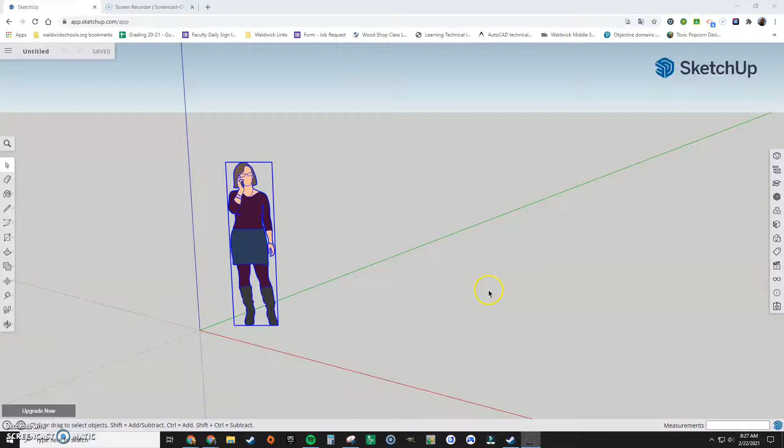In this video, we are going to emulate or mimic a routed edge in SketchUp.

Start by going to the bottom left item and clicking the magnifying glass. Here it says field of view, and if you change that to 0 degrees, it'll give you a flat view. Once you do that, click this magnifying glass, and it'll zoom you out so you can work with your things. It's much better for making flat sides of your object.

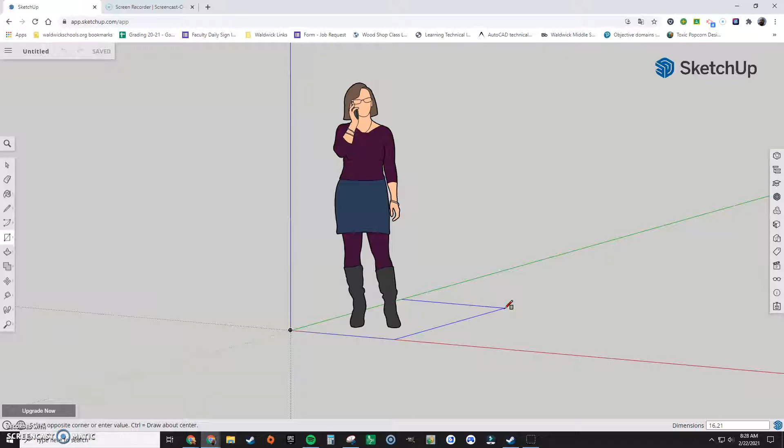Let's get into it. In order to do this, we need a rectangle because we are going to create a box that's 16 by 21 inches. Then we can get rid of the lady.

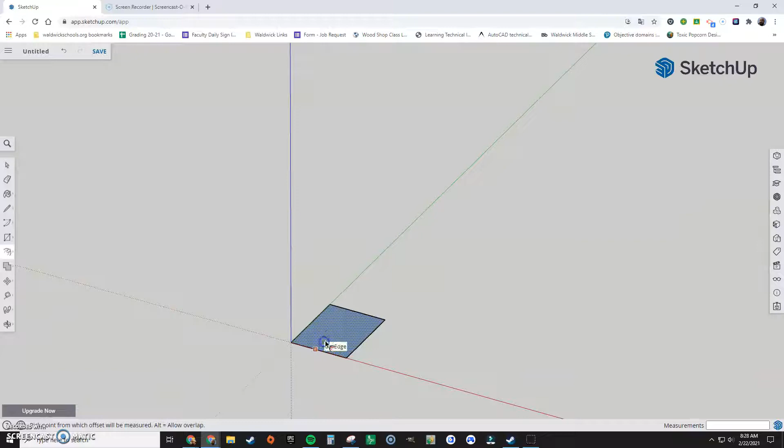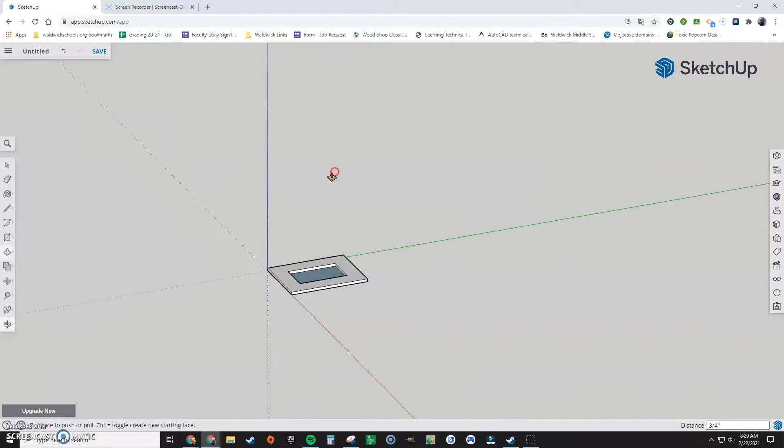Now we're going to use the offset tool to create a picture frame. I'm going to go offset, just to get a concept of how to do our routing, and offset this by 4 inches, so it's got a 4-inch boundary along the edge. Now I'm going to push-pull 0.75 inches, just like the wood we have available in the workshop, since we're doing the simplest type of routed edge.

Now our next task is to draw the edge that we are going to be routing. For today, I want to give you something fairly simple. Get your tape measure, and create a guiding line that's 3/4 of an inch: 0.75, enter.

Now we're going to get the protractor. Click the guide point we just made, click the end, and type in a 45-degree angle. This gives us a nice guiding line that we can use to create our routed edge.

Now, in order to do this, I'm not going to use measurements. I'm just going to draw some lines to help it look like a type of bit. I think that's called a cove.

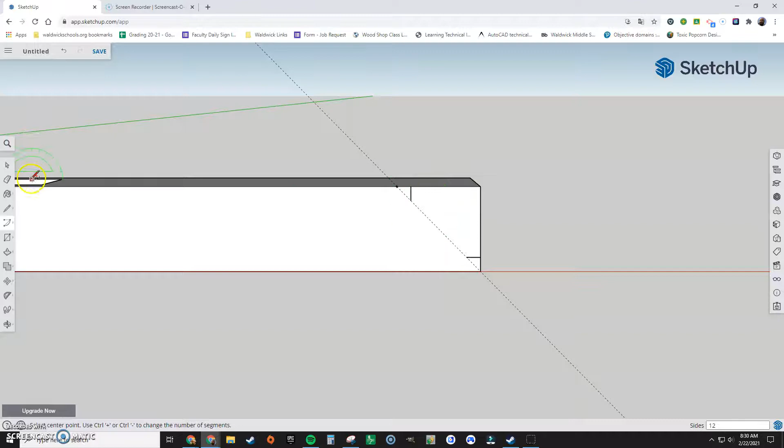Now I've drawn 2 lines that are close enough to each other, and I'm going to use my arc tool with the first one chosen. Let's try it again — getting that arc tool, I'll hover my mouse. There, it's snapped, and you can see blue and red guiding lines. I'll click this point, then select one of the endpoints of the lines, and select the other. If it isn't perfect, don't worry about it — just make a connection between these lines.

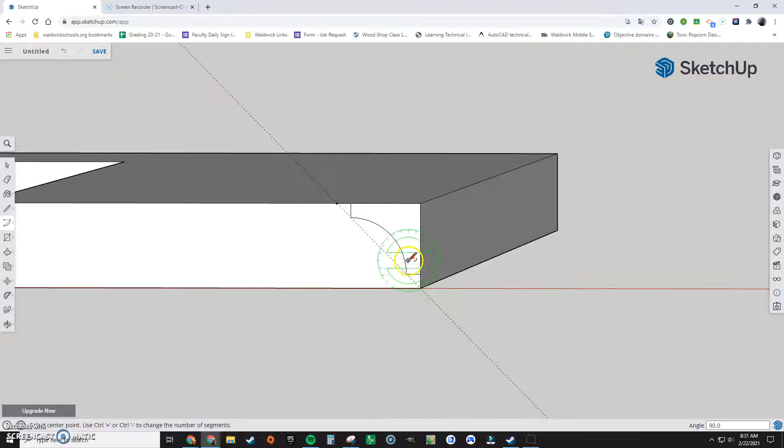One issue here is that if you have something way too complicated, what we're about to do will not work. At this point, you've got your design made. It looks great. We're ready to go.

Now we're going to use a tool called Follow Me — it looks like a little crab. I don't fully understand the picture, but you click that.

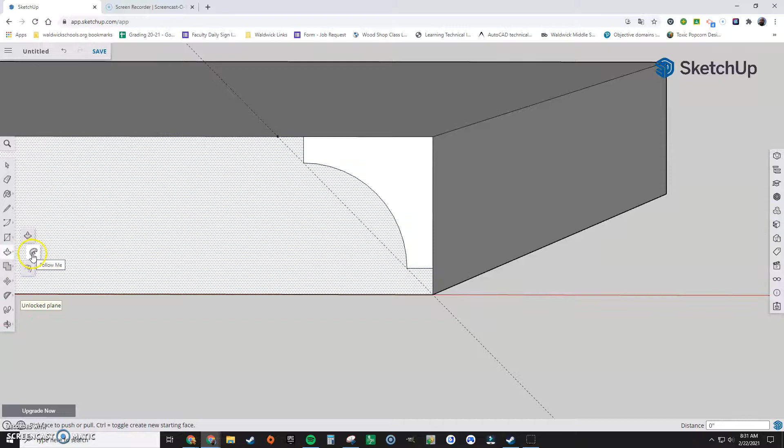Now we're going to do the magic: select the area that you want to remove. I'm going to take this cutout portion, click it, and use it to follow the edge of the entire object. I follow all the way.

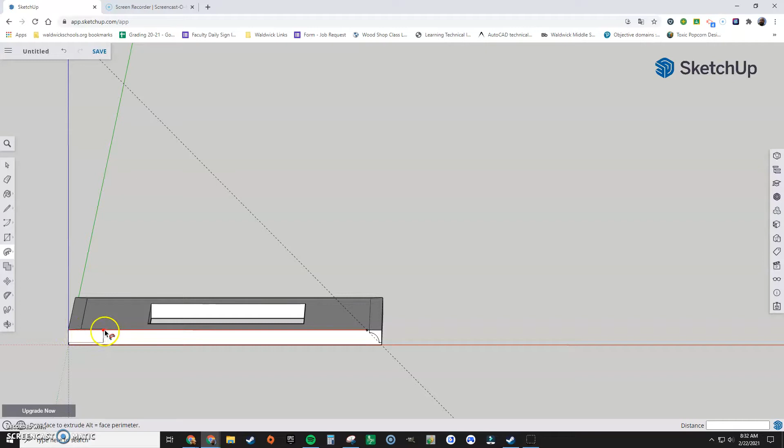Let's see, I think that's it — nope, foiled. Okay, I'm going to Follow Me again. It gives me a preview, and that preview lets me see the result. There we go. Now you can see I've got this mitered corner cut, and when I click, it has applied my routed edge to the entire surface.

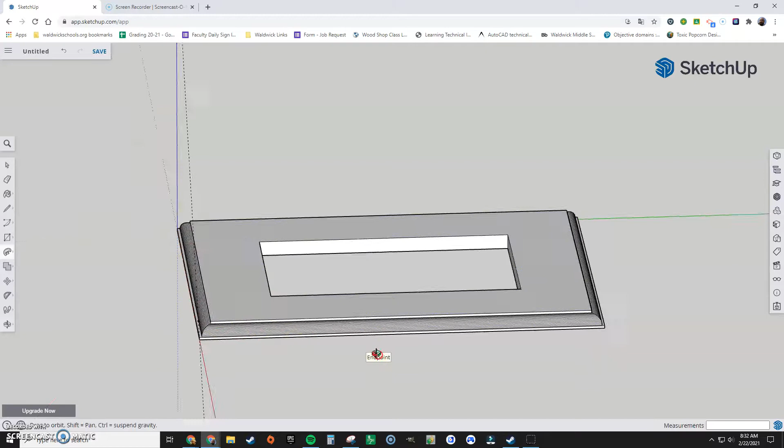For submission today, you're going to need to have the outside done. For the inside edge, how can we do that? The inside is a little trickier to do, and that's something I don't want us to get into today.

So for today, what I want you to do: open up SketchUp, make your rectangle, and route that edge.